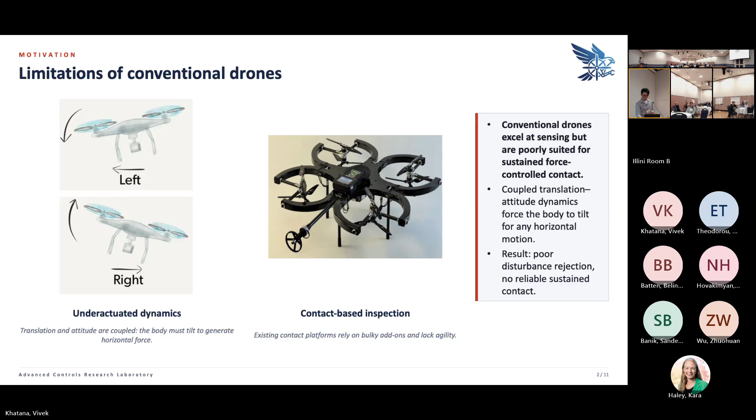Typically that's fine, but for certain applications, like contact-based inspection with an inspection probe at the front, you don't want that detector to move up and down while moving the platform. That's why we came up with this platform that has omnidirectional flight capability - it has 8 rotors in a 14-inch cube shape, the mass is around 1 kilogram, and it can hold up to 2.7 kilograms. I also built a custom PX4 controller for the whole architecture.

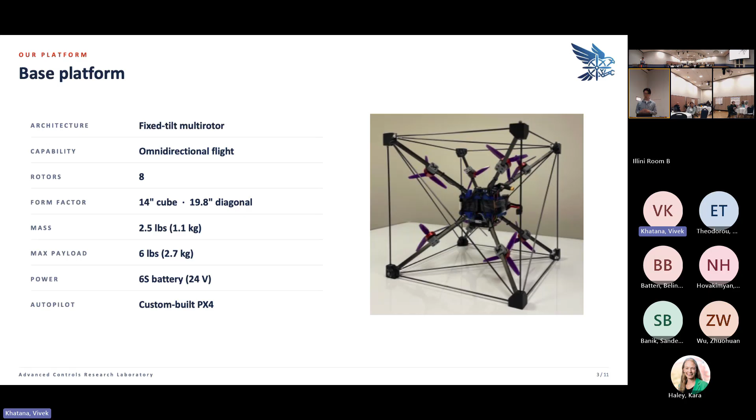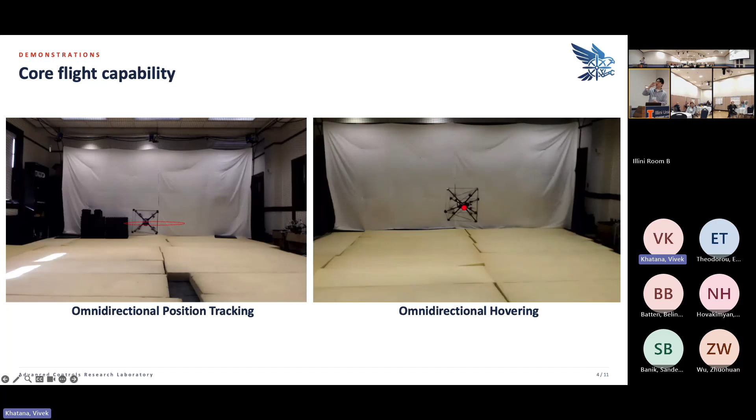Using the proposed hardware and my custom-built flight controller, I was able to demonstrate omnidirectional position tracking. On the left, although it's tracking the trajectory quite fast, the platform barely tilts, because it doesn't require the platform to tilt to move horizontally.

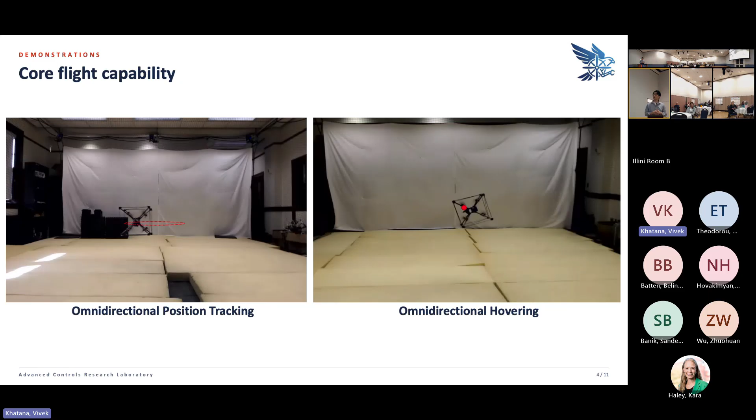For the omnidirectional hovering case, unlike a quadrotor that flies away if the platform tilts, our platform, thanks to its omnidirectional capability, can stay at the same hovering point while rotating in many directions. For more details, I'll have a poster session - please visit if you have more questions.

By expanding my controller with the L1 adaptive controller, we were able to show stable hovering under strong fan disturbance. Going further, we've shown high precision flight inside a narrow space, which generates strong disturbance - but as you can see from the orthogonal view, the platform barely moves thanks to the L1 adaptive controller capability.

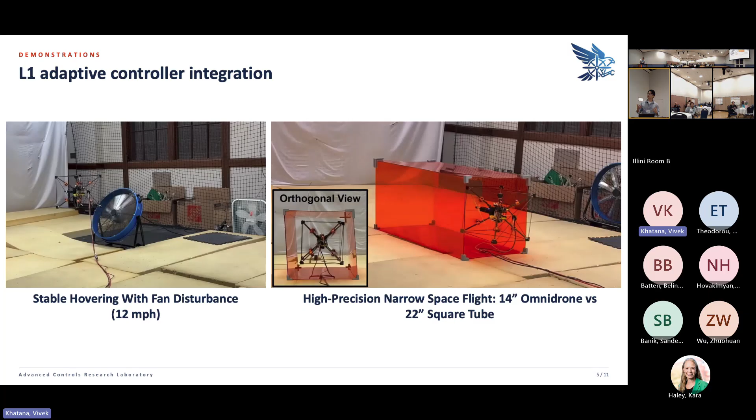It gets more fun at this point. Utilizing the stability and agility of the platform, I'm trying to expand it as a general aerial manipulator. On the left, the platform is tracking my hand motion, enabling a teleoperated system. There are also actuators - for now it has a cleaning squeegee to clean a whiteboard, so I was able to show teleoperated cleaning on a vertical surface using the L1 controller, completing the task very well.

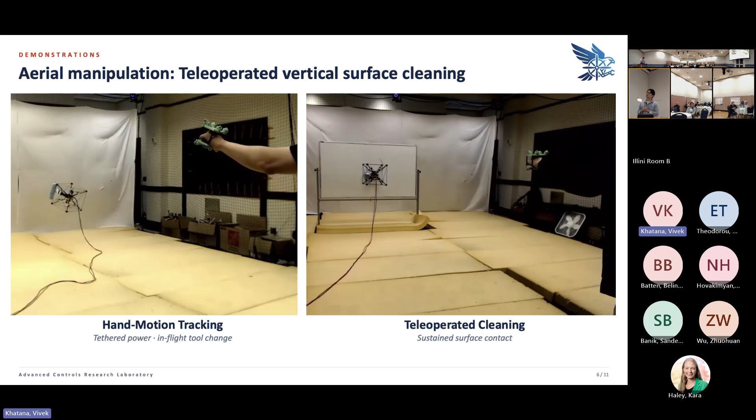It's quite similar - I then attached a board marker to the system and was able to show teleoperated vertical surface writing.

So with the same controller, it can deal with the frictions, and it can also deal with some disturbance from the cable. But with the L1 and the contact-based controller, I was able to do the teleoperated writing without a problem.

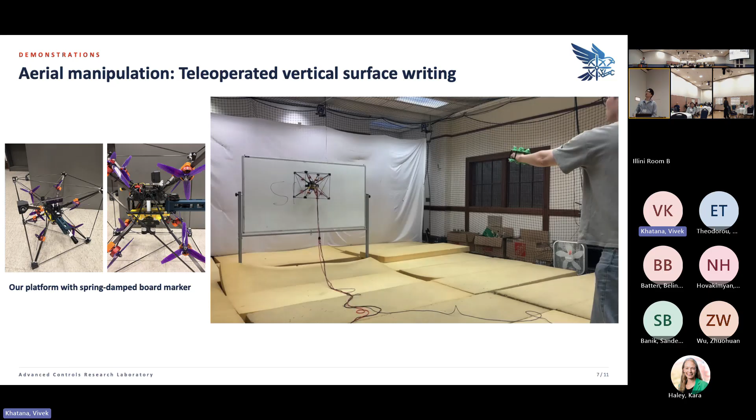I think this is kind of a highlight for our platform. So even expanding the platform further, I made the whole system autonomous, not just a teleoperated system. To make the system more challenging, I also put a strong fan on it, which generates around 12 miles per hour wind. Also, to highlight the omnidirectional capability, we've done the task on the inclined surface of the whiteboard instead of just a vertical surface.

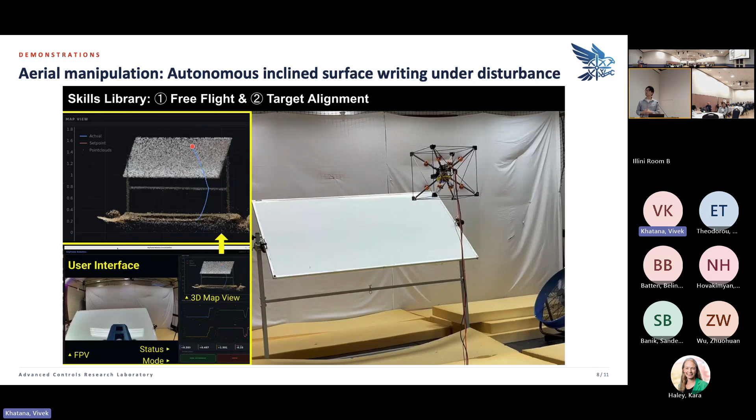At the left top corner, you can see how the platform behaves for the given target trajectory. At the left down, you can see what the first person view of the system looks like. So it's writing Skyframe, which is one of our project names.

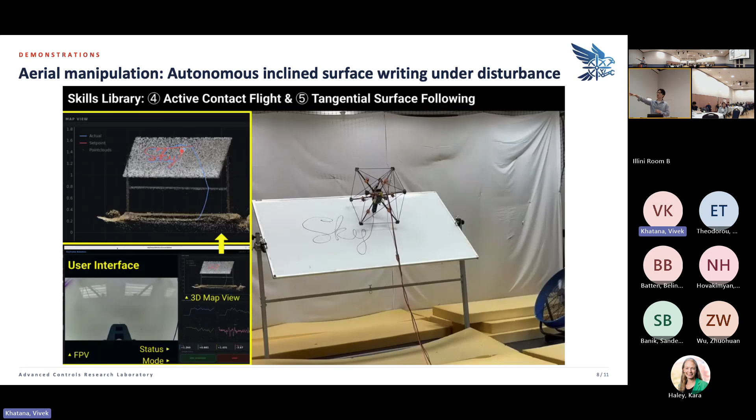You can see that although there are strong disturbances from the tether and also the fan, it was able to do the task very successfully without any issue.

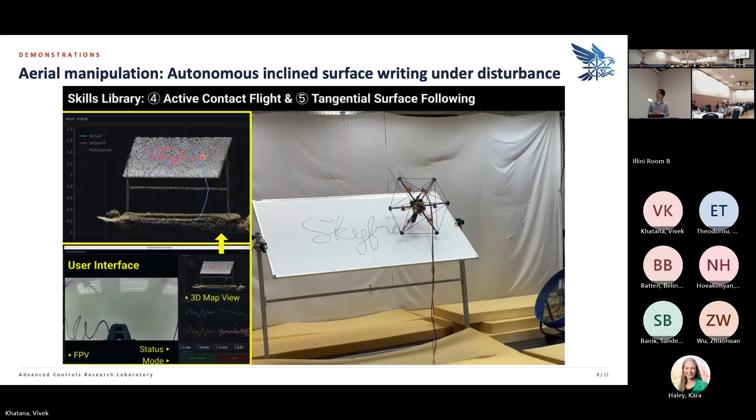To even expand further, we attached the gripper to the platform. Our idea here is that we don't want to have just some kind of surface measurement system, but we wanted to expand the concept of humanoids doing dexterous manipulation to replace human work on the ground. We wanted to be like humanoids' hands that fly at heights and then do the job, instead of humans doing those jobs.

For that direction, we attached the gripper, and I was able to do the pick and place in a teleoperation manner. So there is me behind, trying to locate the water bottle that's moving because of the downwash. But thanks to L1 adaptive control, with the disturbance from the water bottle and also the tether, I was able to do the teleoperation without an issue.

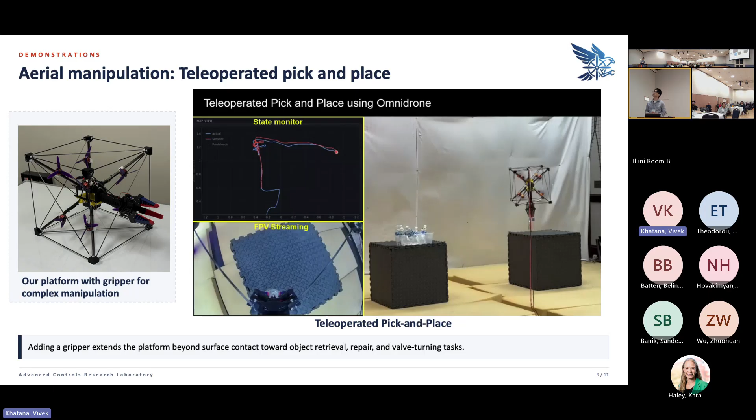The reason we are not using imitation learning is that it's optimized to play badminton with the human body, but we wanted to see what would be the best policy for the drone, this platform, to play badminton. So that's some of the direction I'm working on to make this new concept of going beyond the typical aerial vehicle.

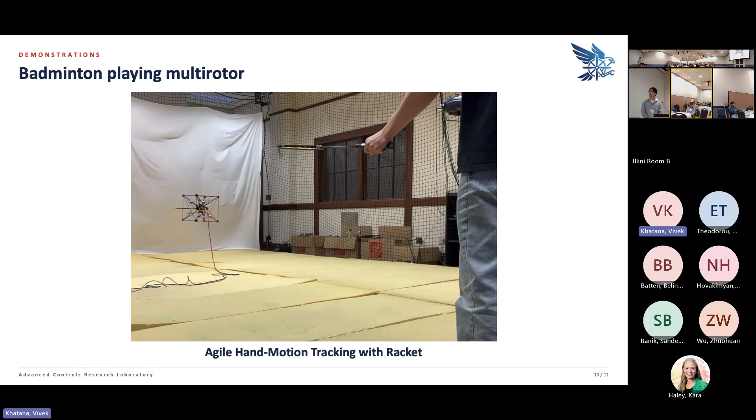A question about your Isaac-based simulation training: do you consider at all the aerodynamic side effects of having the blowing of the multi-rotor propellers into the badminton ball and its trajectory? Yeah, so that's a great question.

So that's something it's really hard to model, but I've done some preliminary experiments of hitting the badminton shuttlecock, and it seems like since the badminton shuttlecock is coming very quick and there's not much time to interact, there should be some kind of disturbance, but it seems like it was kind of negligible.

Right, yeah. And since you mentioned that you're trying to capture non-conventional ways of hitting the ball, are you penalizing any contact with the body of the multi-rotor, or are you only assuming that the only right way to hit it is with the paddle? Or are you just letting anything happen? Can you clarify what you mean by which one you penalize? Are you trying to make the ball return in any possible way?

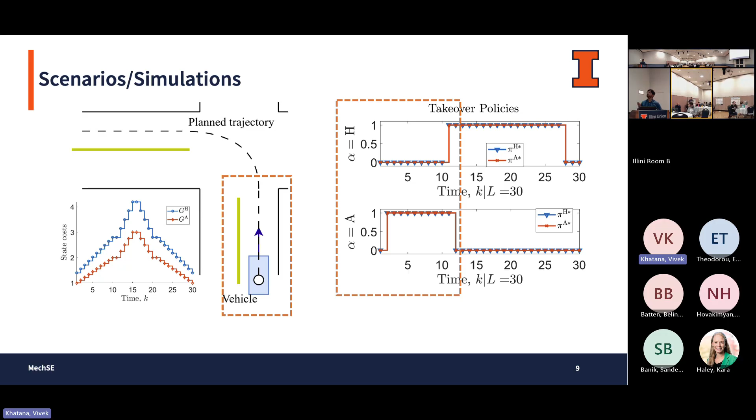This is one of the scenarios or simulations of a vehicle which is trying to go straight, encounters an intersection, and then takes a left turn. You can see there are regions in which it is better for the autonomous agent versus the human agent to operate. Here, the human is saying I will retain control, and the autonomous agent is saying please take back control, human, you will do a better job here. But in the turn, in this curved segment, it actually is better for the agent to take control of the system, and the human also responds in a similar way.

This also has been extended and tested in nonlinear systems, like the classic mountain car example. And this is like the profile of what the human autonomy switching looks like.

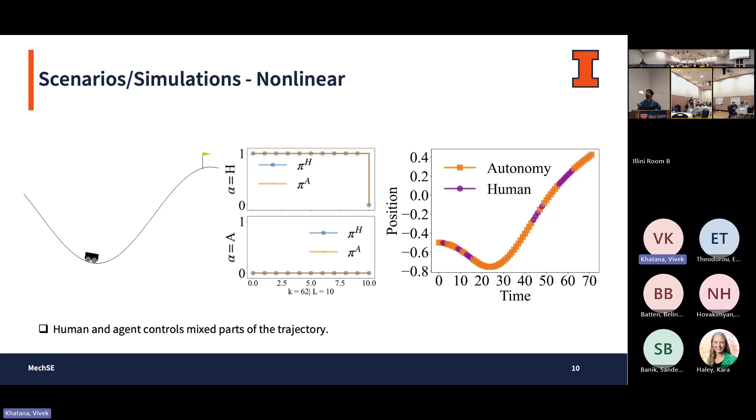But the more interesting question is, we are thinking of this framework which sits here, and to extend this to non-linear settings or settings where we get data from, and we want to understand and fit this value of what the human is versus what the value of an agent is, and communicate back to the user through some of these tools, which is very natural language based.

Moving forward, we are also looking into systems where if you replace this autonomous system, let's say with speech, or you can imagine conversation as dynamics conversing between you and the AI or the agent, there are parts in which the human needs to intervene. This will be very useful when you have critical or sensitive information, such as financial or medical information. This framework basically allows you to exactly say when the human should intervene and when to let the autonomous agent run free.

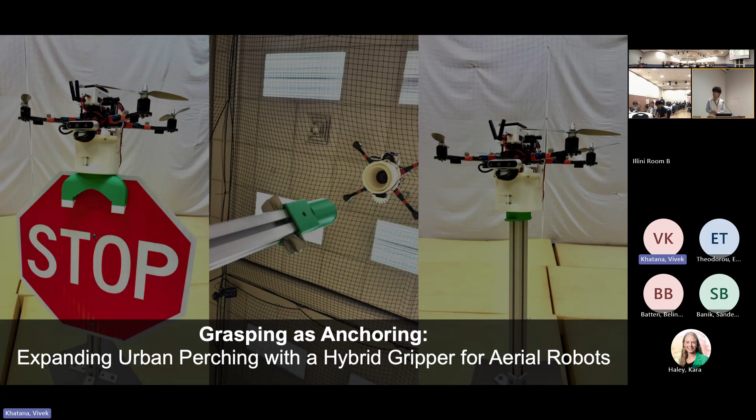The first one is the grasping as anchoring, expanding urban perching with a hybrid gripper for aerial robots. The motivation is that perching actually saves energy for your platform, and grasping lets the platform do some physical interactions. But few solutions can actually achieve both.

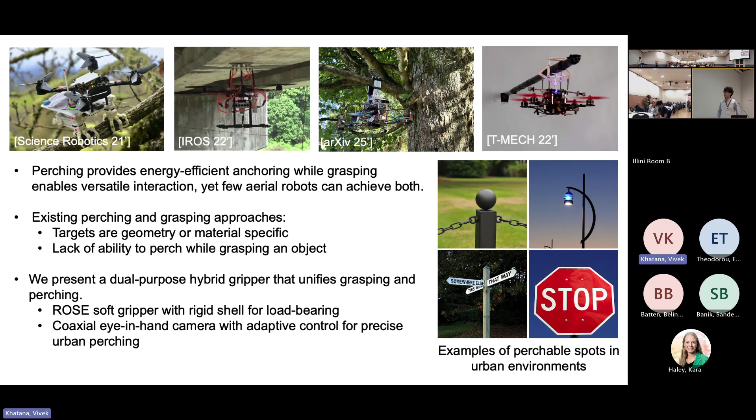The existing solutions require the system to have specific perching tools or specific perching surfaces or geometry. We don't want that. We want to let the platform perch on really strange or irregular surfaces, something like a lamppost or a stop sign. So that is basically our structure.

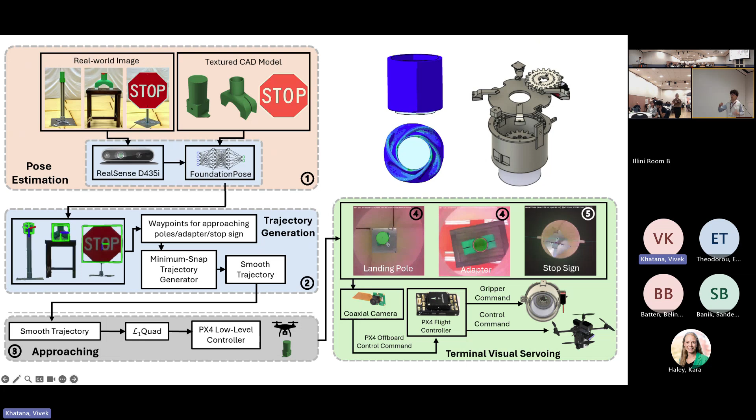So we got soft grippers. It can basically grasp like that, and that is the layout for our hybrid grippers. We adopt FoundationPose, which is a foundation model that lets us throw the CAD model in and gives us the world space XYZ coordinates, and then we use those coordinates to generate a smooth trajectory.

We let the geometric controller augmented with L1 track that trajectory, and then the drone hovers above the landing target. You see this picture right here. There's a down-facing coaxial camera that lets you do visual servoing to make sure your target is always in your eyesight.

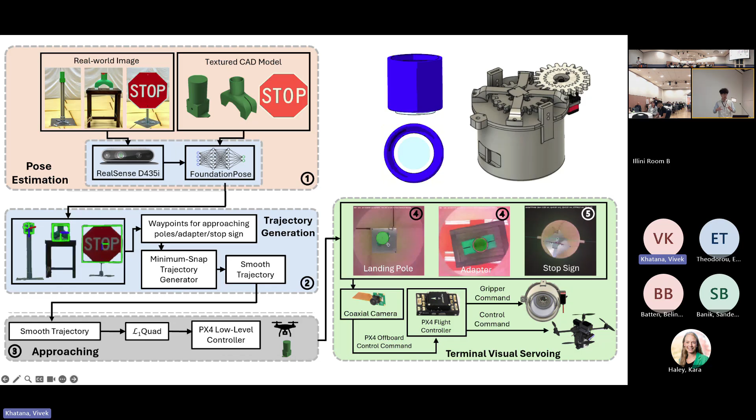So that is the first demo, where we let the target take several poses. FoundationPose captures the coordinates for the target landing pole, and after a while, the drone hovers above the landing pole, and then the

So I got a little buddy right here. That is the soft gripper right here. It can close like that. So it actually can adapt to different geometries. And we show this graphic here. Never mind.

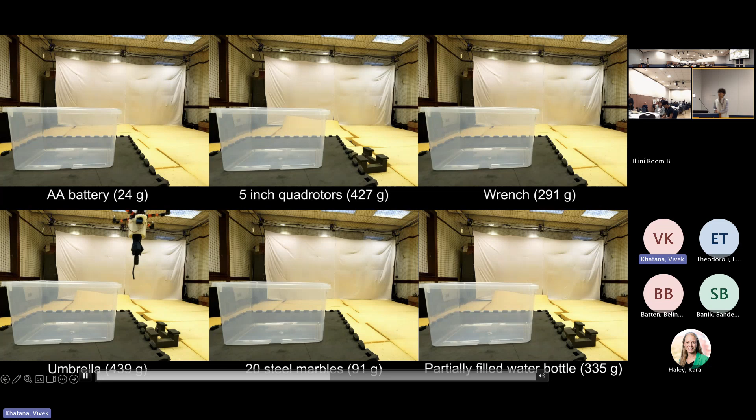So actually here you see some great demos, where the quadrotors are capable of grasping batteries, marbles. We can actually watch again. Umbrella, and this kind of partially filled water bottles. And thanks to L1, all the trajectories track pretty well, and we can do the stuff on target.

Yeah. And the next experiment is the most exciting one: the drone can actually grasp the adapter and then land on the stop sign. It basically uses the same logic as before. The drone identifies the target, hovers above it, does visual servoing, gradually touches down, grasps, then re-takes off, does similar stuff, flies above the stop sign, and then lands on it.

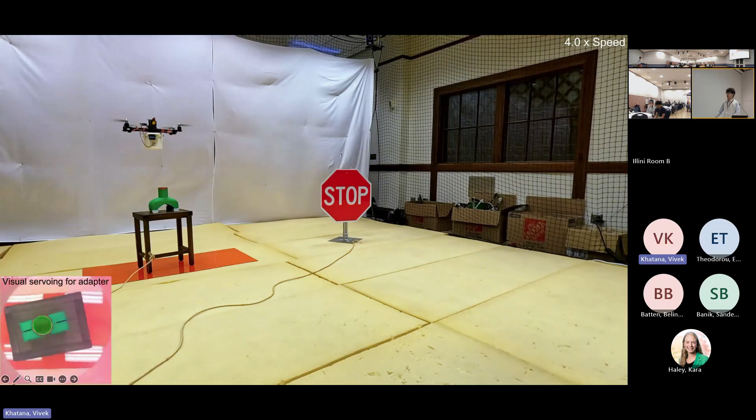So normally the drone cannot really perch on those kind of irregular surfaces or abnormal planes. But in this case, the drone can actually grab the grasp-based perching pad, then it can land on those kinds of stop signs.

For future work, we're probably going to implement a vision language model to let the drone decide whether that is a perchable site, whether I need to grasp something to land on this, and also we're going to do some cool demos in real outdoor scenarios. So basically that is my first work.

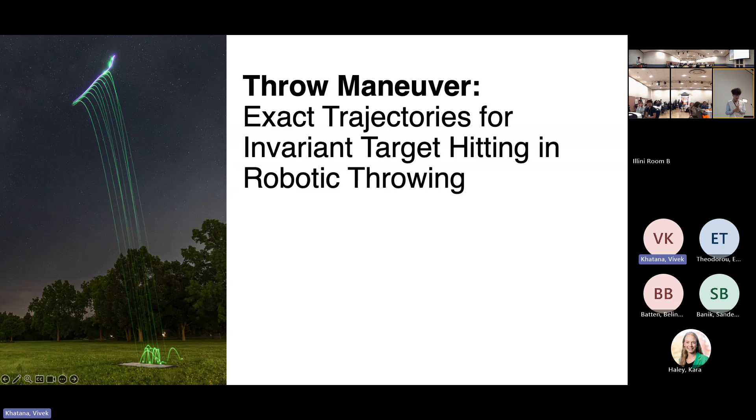My next thing is this throw maneuver, which is exact trajectory for invariant target hitting. So throwing robots exploit gravity to deliver objects, but the existing solution is really determined by the time. So for example, you want to throw an ID card over there.

There's only one singleton of time you can throw the stuff and have it land on the target. But we really don't want this kind of stuff happening. So we developed this throw maneuver, which is a carrier trajectory that guarantees target hits regardless of the releasing time.

It was inspired by last year's California wildfires. If you remember, there's a giant plane spreading fire extinguisher chemicals all the way. That is chemically inefficient. It is time inefficient. So if we can throw a bunch of chemical extinguisher balls on target precisely, regardless of time, that would be pretty good.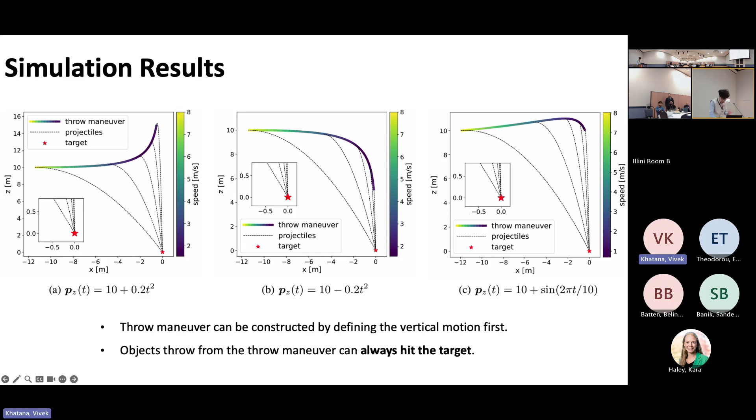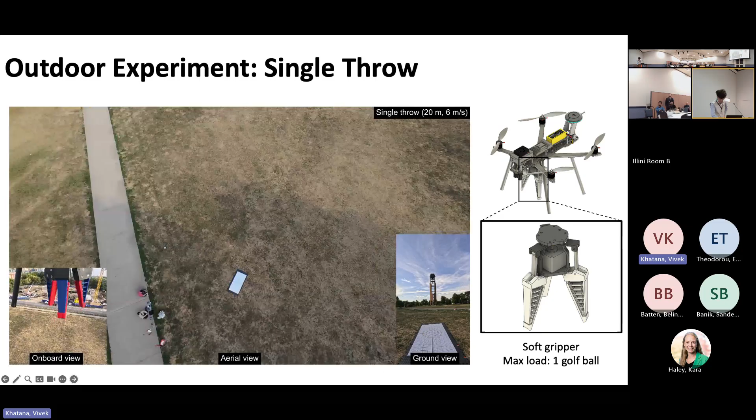And we got some outdoor experiments. So that is a single throw. The drone, with this type of gripper, can grasp one golf ball at a time and throw it on the target. So those are the results. We repeat the throw 10 times under different spatial configurations. Throw maneuvers can actually achieve smaller mean error and CP90 than the constant velocity throw, and also the tube acceleration zone, which is our strong baseline, showing a better accuracy.

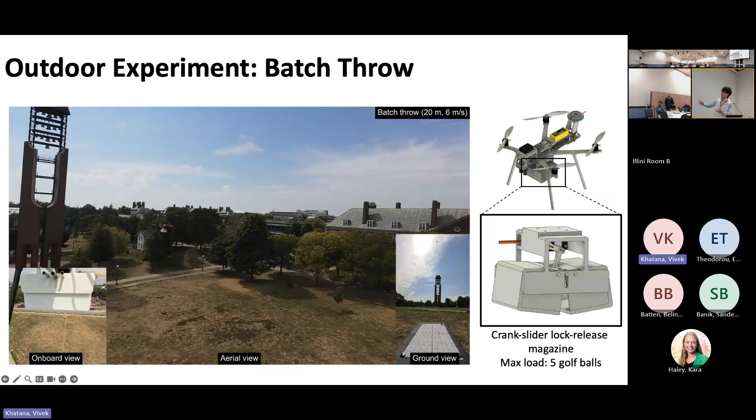And we also tried a batch throw, which contains a crank slider lock release magazine that can contain 5 golf balls thrown at a time, and we achieve similar results. We beat our baselines, which are hover throw, constant velocity throw, and the tube acceleration baseline.

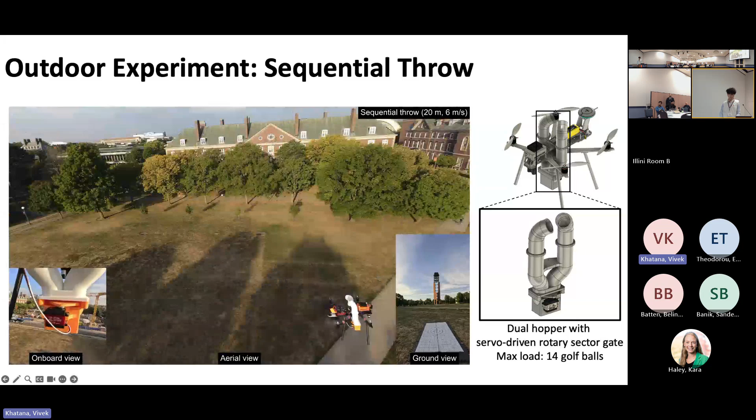The most interesting result is the sequential throw. We use this dual hopper with a servo-driven rotary sector gate to launch 14 golf balls at a time. If that is not clear, we have a really cool demo at night. We use glow-in-the-dark balls, and you can see the trajectory. And we can go once again. So we have to start right here. So that is the result.

Since the tube acceleration method does not really guarantee hits in this 10-second time interval, we can only compare with the hover throw. Although the CP90 is a little bit bad, we still achieve a better mean error, and the kinematic nature of the throw maneuver makes it a favorable option for this kind of time-invariant throw, which makes it a choice for applications like wildland firefighting. So yeah, that basically concludes my talk today.